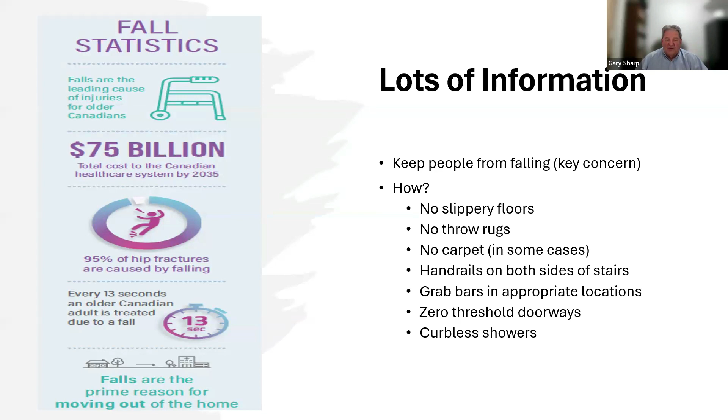No slippery floors, and in the course we talk about how you know that based on testing on flooring. What you may not know is that some people with dementia shuffle their feet when they walk, so carpet can become a tripping hazard, and throw rugs of course become quite dangerous. Grab bars, zero threshold doorways, curbless showers, all that kind of thing is part of the course and part of the manual. We also talk about stairs.

These are not code minimum stairs. These are 7-11, which some of the advocates for accessibility say is a better stair. So we talk about what makes a stair a better stair.

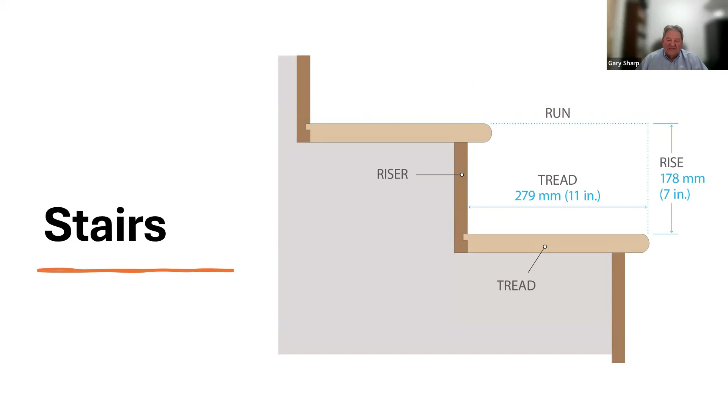We talk about empathy, walking a mile in their shoes. Many of the renovators out there are the most healthy people around, and you are going to a meeting with someone who is almost exactly the opposite of you. Someone who is mobility challenged and may not be able to move or get around as quickly as you do. So you need to have some empathy for these people.

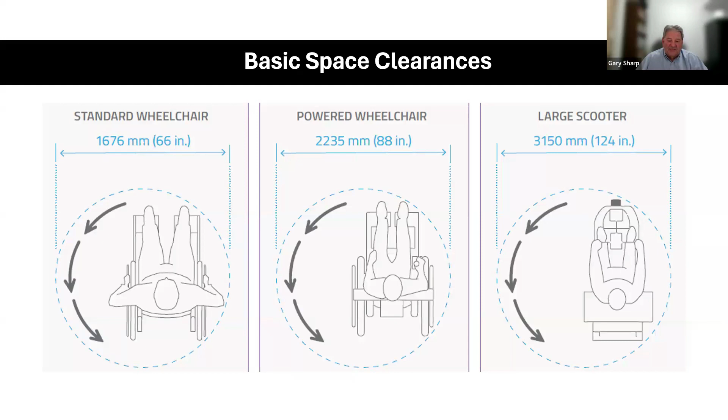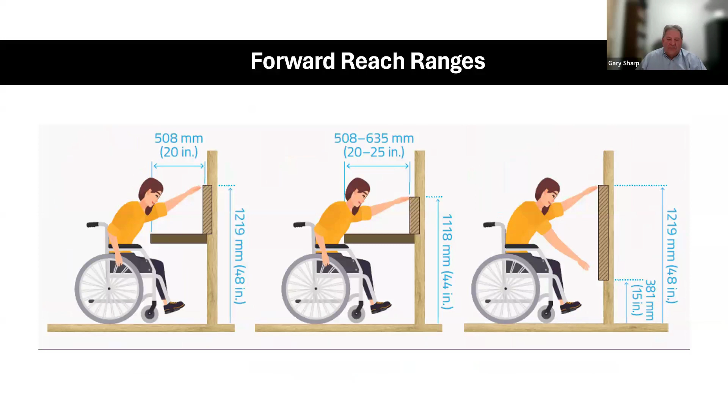Space requirements. Wheelchair, standard wheelchair, power wheelchair, scooters. How much space do you need? Reach ranges, side reach, forward reach. All of this is in the manual.

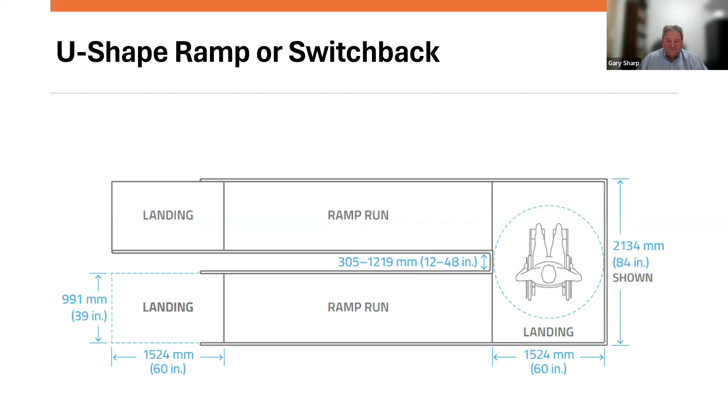We talk about ramps. One of the big questions is, how do you get your client from the street into the house? A ramp is one of the more popular options, but how do you build a proper ramp? How do you do a curbless shower? We talk about that in the course.

Then we've got the course, and the course is 2 days and exciting, without a doubt. We try in the course to minimize the amount of time that you're away from the job site if you're a renovator or a builder.

So part of the course consists of pre-course materials that we send out. Some of it is things you already know or have some experience with, like contracts, marketing, and insurance. Other parts are things like privacy, professional partners - we're talking about physiotherapists or occupational therapists to help you figure out what renovations you should be making for a client - some demographics, and client communications, that kind of stuff. So things you can study for ahead of the course.

Then when we get into the course, we've got a full day, a pretty solid day one, talking about ramps and home entrances, bedrooms, closets, stairs, flooring. That part of the course we've got live instructors, whether they're on video or face-to-face, and we've also got some instructional videos from other instructors, just so you don't get bored listening to one or two people for the whole day.

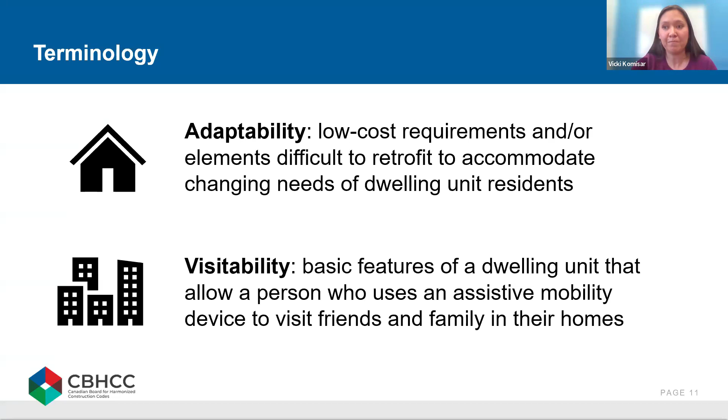Okay, so looking ahead to what's proposed for 2025 for the NBC. We'll start with some tweaks to the National Building Code framework, which focus on the accessibility objectives and the application of technical requirements. We'll then dive into adaptability, which focuses on low-cost aspects that would apply to all houses and to some units in multi-unit residential buildings, or MURBs for short. These homes would require wider entrances for mobility aids, reachable controls, and backing for grab bars in washrooms. You'll see that this is a fairly short list of changes, recognizing that there are very few homes or features that can be implemented in practice to make a home truly universal.

We'll then wrap up with visitability. This is a different subsection, different application, intended to apply to some units in multi-unit residential buildings at the discretion of the authority having jurisdiction, but not to houses. The visitability piece expands on adaptability to also address wheelchair access to living and dining spaces and the washroom.

As the visitability requirements are a lot more space intensive, the application is correspondingly a lot more limited. Just so folks know what's coming with the public review periods: the proposed changes to the NBC framework and the technical changes for wider entrances and reachable controls are currently out for public review. There's also a public review plan for spring 2024, which will tentatively include the proposed changes for backing for washroom walls and for visitable dwelling units.

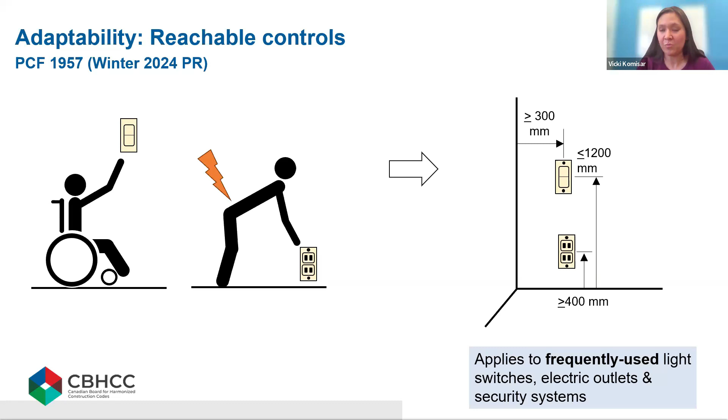We've wrapped up the portion of the presentation dealing with the proposed changes under the winter 2024 public review. We'll now walk you through the changes that are tentatively slated to go to public review in spring 2024, to round out the package for this cycle.

No presentation would be complete without discussing grab bars in the context of the codes. Grab bars are common technologies for preventing falls in the washroom, but the design of stud walls can make it difficult for people to install grab bars where they need them, because you need to hit the studs. To make it easier for people to safely install grab bars where they're needed, the next few proposed changes address backing for grab bars. They focus on structural strength requirements of the backing material and the minimum wall area for backing around toilets, bathtubs, and showers.

Just a quick note that these proposed changes would only apply to stud walls and not to concrete walls. Also, just so everyone's clear, these are not a proposal to require grab bars in the home. It's just to make it easier for people to comply with their occupational therapist's recommendation to install grab bars in the location recommended by the OT.

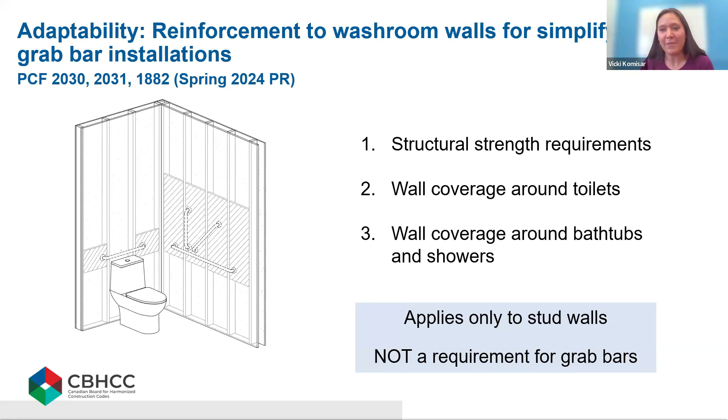The first change for backing deals with structural strength requirements, so that grab bars installed in backing don't detach from the wall by mistake. It would require that the material and the method of attaching it to the wall studs allow grab bars to resist 1.3 kilonewtons of force, as already required in the NBC. Designers can use any material, type of stud, and method of attaching to the stud that they want. This is like existing requirements for backing in Ontario, Nova Scotia, and BC.

One piece has been added to the proposed change based on a request from some of you at CHBA. To make it easier for designers, builders, and homeowners to comply with these structural strength requirements, the proposed change also offers prescriptive guidance options for wood. These options provide guidance on the thickness of the dimensional lumber and plywood needed for a designer to comply with the structural requirement, and also provide options for how to fasten the backing to wood studs. Other options for materials like metal studs are currently in development.

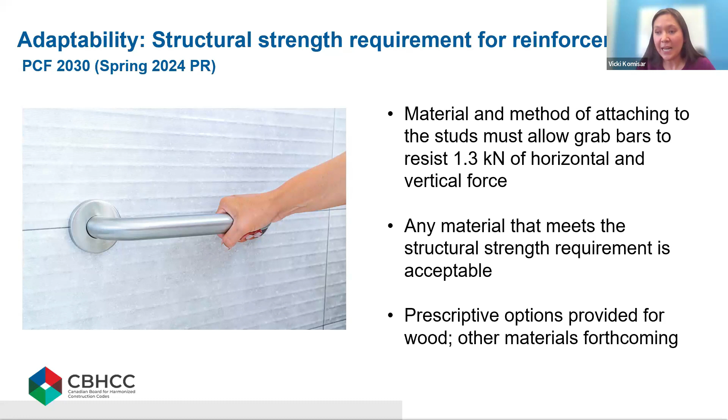Okay, moving on to toilets and grab bar backing.

One common thing that came up in community consultations is that being able to access the toilet independently is a common make-or-break for aging in place versus having to move into long-term care. It's important for dignity, and for not having to rely on incontinence products or a caregiver to help someone get to the toilet. To that end, this proposed change prescribes a minimum area for wall coverage beside and behind the toilet, making it easier to install grab bars to help with getting on and off the toilet on their own.

There's an exemption for the sidewall coverage if the toilet is too far from the wall to be reached. The change would also not apply if the wall of interest is not present or too short, such as if the only possible layout in the washroom requires a door be beside the toilet.

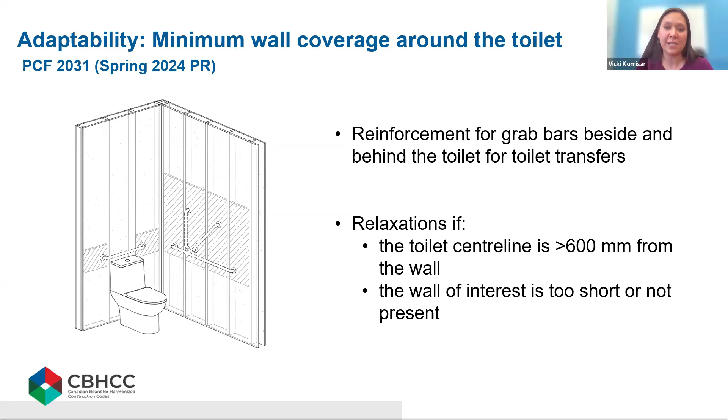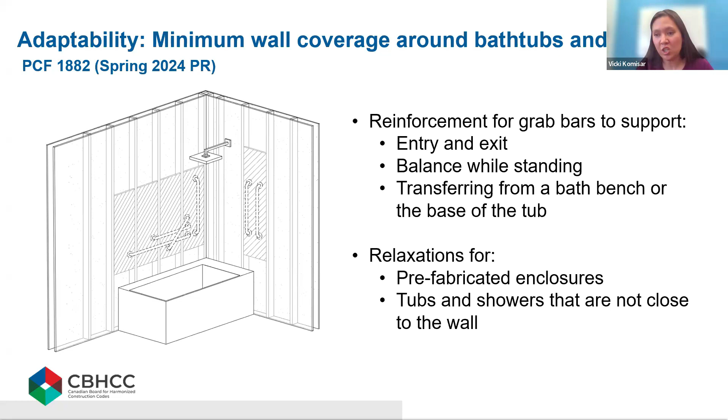The third change under backing addresses the minimum area for reinforcing the wall around bathtubs and showers so people can more easily install grab bars to access and use their tub or shower. The locations focus on where grab bars are often installed for entering and exiting, for getting up and down from the bath bench or base of the tub, or for avoiding a fall after a slip. The backing requirement is relaxed for prefabricated enclosures of bathtubs and showers, and for tubs and showers too far from the wall for a grab bar to be reachable.

Okay, so I've wrapped up with the proposed adaptability changes. We'll just run briefly through visitability.

As a reminder, these proposed changes would only apply to a subset of units in multi-unit residential buildings as required by the AHJ. In these spaces, a barrier-free path of travel is generally already required to access the front door of the unit, so accessibility is built into the common spaces of the building already. These visitability changes are not proposed to apply to houses.

The first change under visitability addresses the path of travel on the entrance level of the home to make it easier to access living spaces, dining room spaces, and a washroom while using a wheelchair. The change proposes minimum requirements that would lead to wider doorways and corridors and low interior thresholds. Keep in mind that shared spaces in several modern units are designed to be relatively open concept, so it's a feature that's built into a lot of units anyway.

People also need to be able to access the washroom in the home, whether they live there or are visiting. So the second change under visitability requires a powder room on the entrance level of the dwelling unit. This includes providing enough space inside the washroom for a wheelchair to turn, 1.5 meters in diameter, and allow the user to close the door on their own. It also requires that a sink be a minimum distance from an adjacent wall so a wheelchair can access it without colliding into the wall. Finally, this visitable washroom would also have backing to make it easy for installing grab bars. Occupants could use the extra space for other purposes, such as storing laundry hampers, if they don't need it all the time.

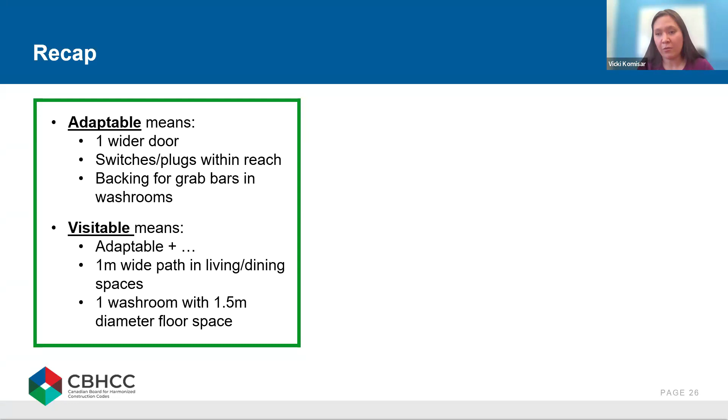There is a proposal to apply the accessibility objective to all types of dwelling units, which is necessary for the adaptability requirements to enter the discussion. It does not mean that all dwelling units need to be fully accessible. All detached houses and other types of dwelling units currently exempt from the accessibility objectives in the NBC would need to be adaptable.

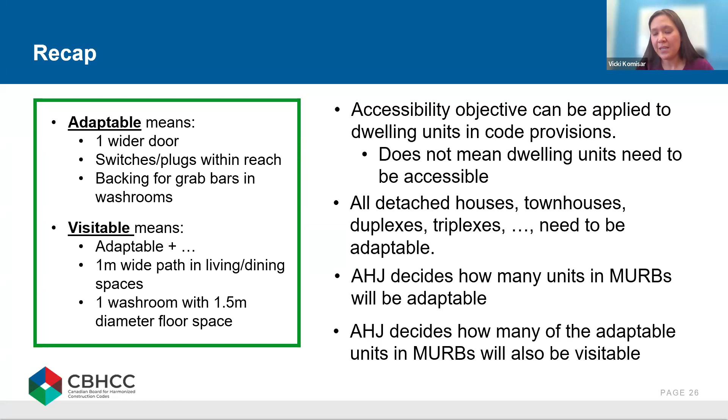For multi-unit residential buildings, the AHJ decides on how broadly the requirements apply. In other words, they decide how many or what percentage of units in MURBs need to be adaptable. The AHJ will also decide how many of the adaptable units in MURBs also need to be visitable.

Let's walk through a quick example. Suppose your AHJ decides that 20% of units in MURBs need to be adaptable and 10% need to be visitable. Consider a proposed development with 50 detached houses and 2 MURBs, each with 80 units. You can see that on the top of the screen.

Starting with adaptable: all 50 houses on the bottom, and 16 of the units in each of the MURB buildings, would need to be adaptable. These would have a wider door, reachable switches and plugs, and backing for grab bars.

Then, looking at visitability, 16 of the adaptable MURB units would also need to be visitable. These are shaded in yellow. They would need a wider path to access living and dining spaces, and a washroom with a 1.5 meter diameter floor space, with a constraint on the location of the sink with respect to the wall.

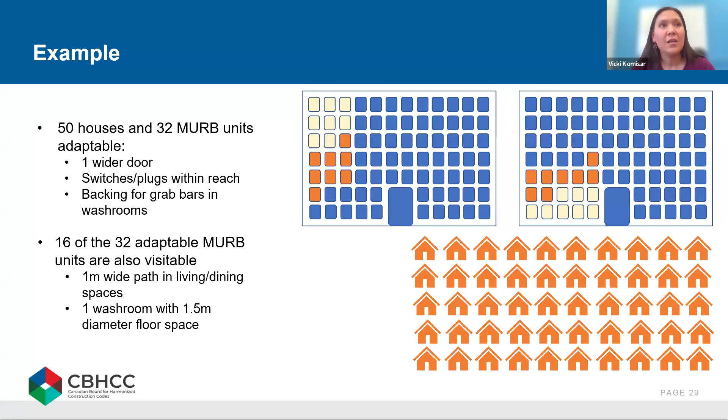I will now hand the floor back to Brigitte to wrap up this piece of the presentation.

Okay, I think I just have two more slides here. You can go to the next one, Vicki. So it's just a little sneak peek at the potential work we'll be working on in the next code cycle. The CBHCC, the Canadian Board for Harmonized Construction Codes, basically oversee the national model codes.

Sidebar: they identified some strategic priorities a few months ago for the next code cycle. There were 7 of those, and one of them is accessibility. Under that topic, we will likely have these 4 kinds of tasks on our plates for the next few years, keeping in mind this is still a work plan, with the anticipated confirmation date sometime in September.

But anyhow, we're looking to work on egressability - how to get people out of buildings, particularly those with various disabilities or needs for assistance. We're going to continue the work on accessibility, adaptability, and visitability in dwelling units, building on what's been proposed for this code cycle.